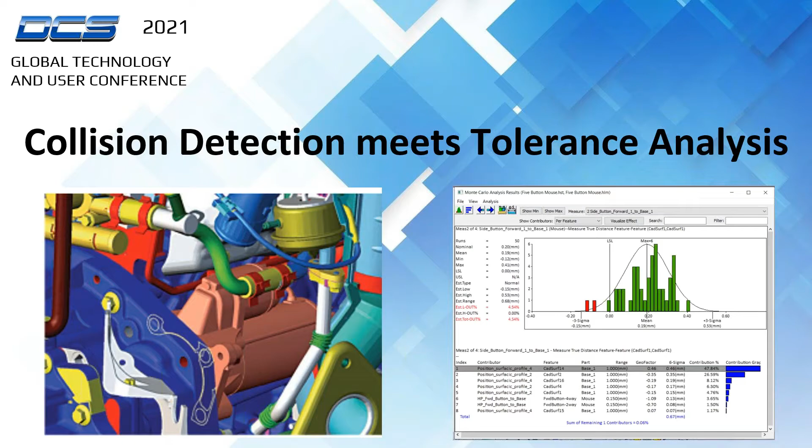Presenting today is going to be myself, Gerhard Bell. I'm a dimensional engineer, ASME certified. Of course, I work for Dimensional Control Systems. And my colleague, Priya, variation analyst and instructor. And she also, which is not listed here, tests our software when we have new capability.

Our agenda today is going to be to discuss collision detection, the difficulty in collision detection, and some new capability that 3DCS has developed. So what is collision detection? It's the ability to predict collision before it happens.

You can see this advancing everywhere, especially in automotive. I love the fact that I can put on my cruise control and practically go to sleep because the radar will slow the car down automatically. That's one form of collision detection. Obviously, if you get in an accident, you didn't detect the collision, but you know there was one.

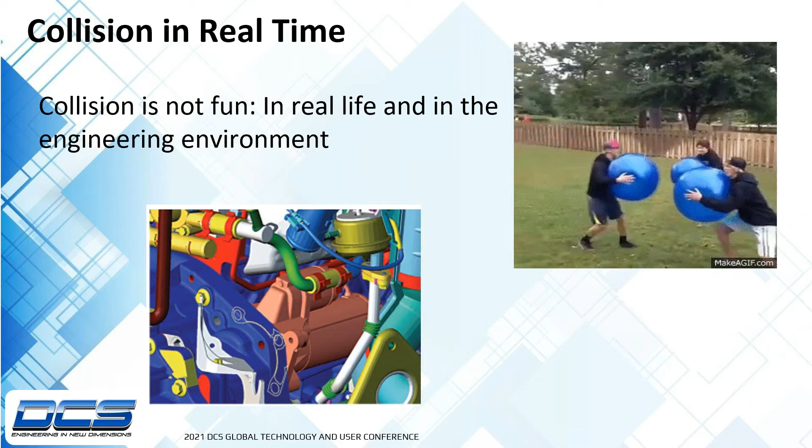Typically, detecting collision is very difficult. The CAD systems can do it, but they deal with perfect parts, and that's easy. They leave it to companies like 3DCS to do collision detection when you have variation. That's difficult. And even though it's difficult, 3DCS can do it right now. But to do it, you have to write a lot of measurements, and you have to kind of guess where you expect there's going to be collision.

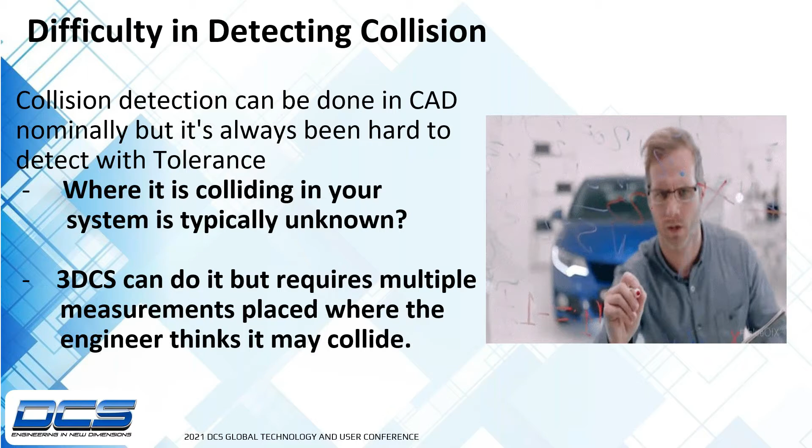Typically, anytime I'm talking to a customer, they say, "Hey, can you do collision detection?" And I get this sad look on my face, kind of like, yeah, but. Yeah, we can, but I tell the engineer, you need to kind of know where you expect the collision to happen. Where's your closest areas? Then we can tell you if it's going to collide, and you would write a measurement there. But it's not really easy, and it's not exact. And you may not pick the right spot.

Well, now this is the exciting part. In DCS's attempt to continually answer the customer's questions or strive to advance the capability of tolerance analysis in that field, we now have collision detection. So finally, when a customer asks me, "Hey, can you do collision detection?" I can say yes. And we've done it by introducing two new capabilities. Priya is way more efficient than I am, so I'm going to hand it over to her, and she's going to tell you about our new single measurement GUI and the multiple measure auto generator. Priya, take it away.

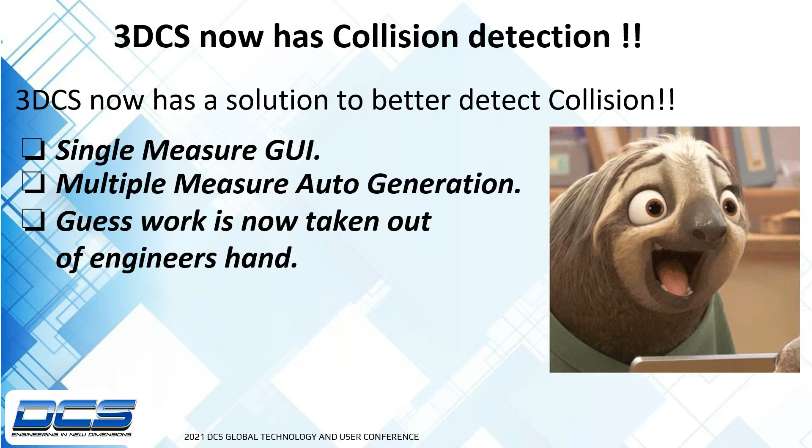All right. Thank you so much, Gary. That was a great introduction for this. So let me take over from here.

So as Gary mentioned, yes, now we can do collision detection in 3DCS. And to do that, we have two new functionalities that we added recently to our mechanical modeler add-on. One is the collision detection generator. Another one is the part distance measure. Basically, the collision detection generator is a GUI where our software automatically generates measurements for the user. And that generated measure is the part distance measure, which I'll cover next.

So this GUI makes it easy for a user, where they can just add the parts to it, and with a click of a button, you can generate how many measures you want.

So what that means, for those of you that are familiar with our software and know about our measurement generator, we already have a measurement generator where you can write X, Y, Z vector direction measurements, but you already have to have your points there, and you have to have the features that you want to measure. With this collision detection measurement GUI, you no longer are writing any measurements. You're just picking the parts that you want to check for collision between. And then this will generate the measurements that you need.

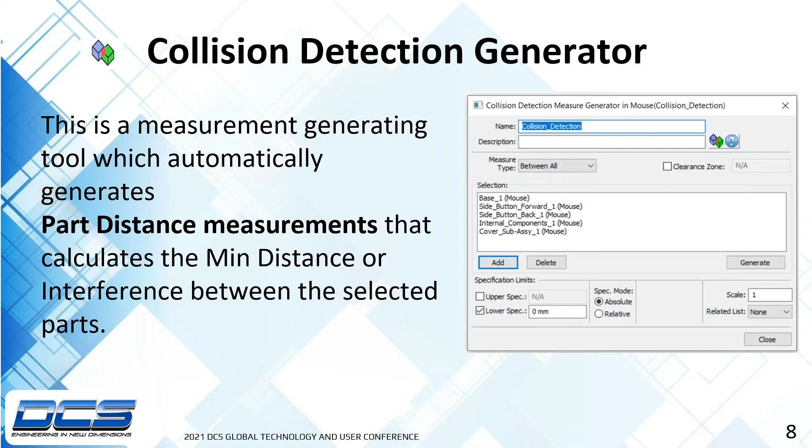And that generated measurement is the part distance measure, which is a new function that we added. Basically, part distance measure is an improved version of our existing feature measure already in our software. You can add parts to it manually, or you can use this collision detection generator GUI to generate the part distance measure, which automatically adds the parts to it.

Internally, how the calculation happens is it looks for all the features of the selected parts in your object part list and tries to measure with all the parts and all the features inside those parts from the two part lists. It gives the minimum distance detected so far with the given information and provides that to be the current value in this GUI. And you have to make sure that it does not really capture all the part information, but only takes in the features that 3DCS has used.

For example, the features that you have meshed using any of the tolerances or moves that you have created in that modeling process. So basically, each part should have mesh in order for our GUI generator to automatically pick that information from them.

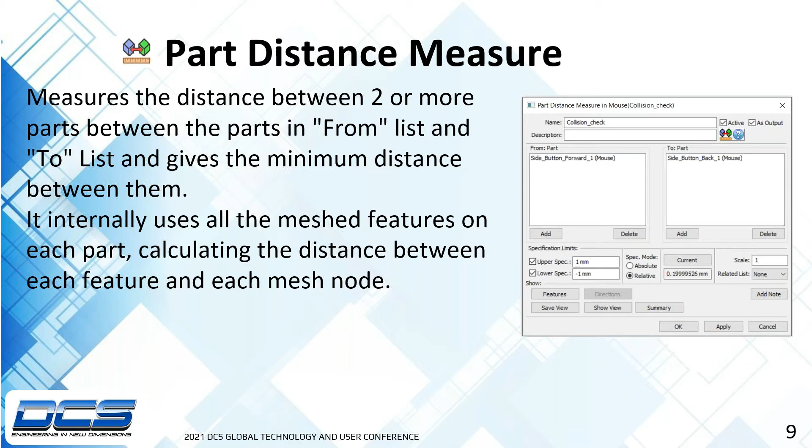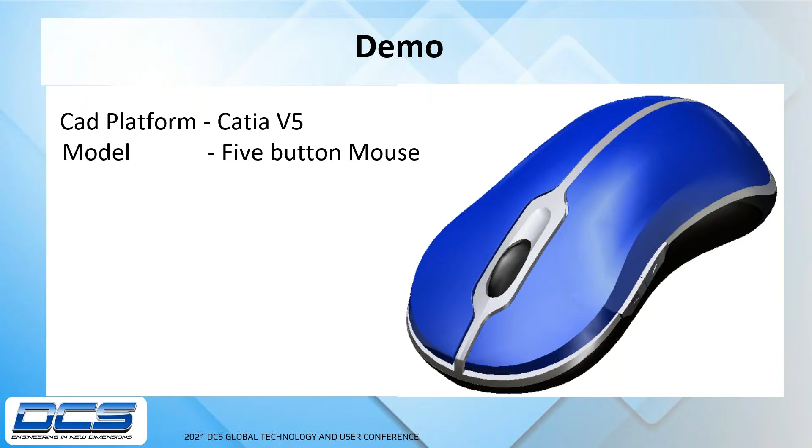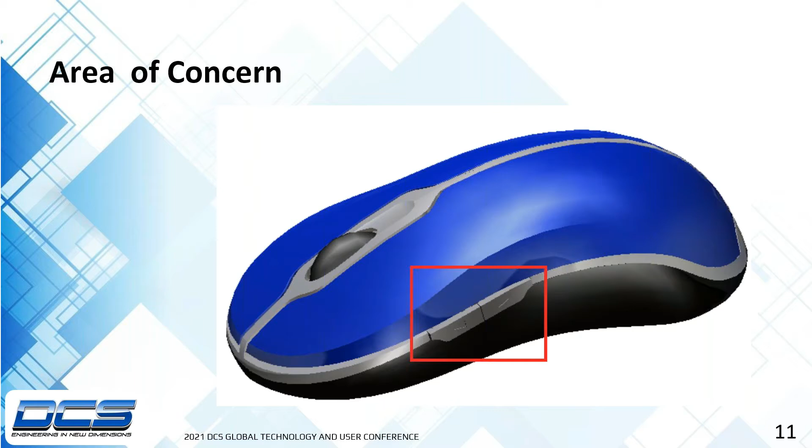All right, so in this demo, I'll be using the 5-button mouse model, and the platform that I'm using for this demo is CATIA V5. In this model, the area of concern, the place that I'm concentrating to detect the collision, is that area that I have marked, which is the gap between the buttons and also all the parts that surround the button. So at this point, I'm going to switch the presentation to my CATIA V5 page where I can show the model and walk you through the process.

So I have the mouse model up. This model is completely modeled with 3DCS where I have already have the moves that make the model build and also have the tolerances already written. Now let me just quickly do a nominal build and deviate so you can see the model being completely done.

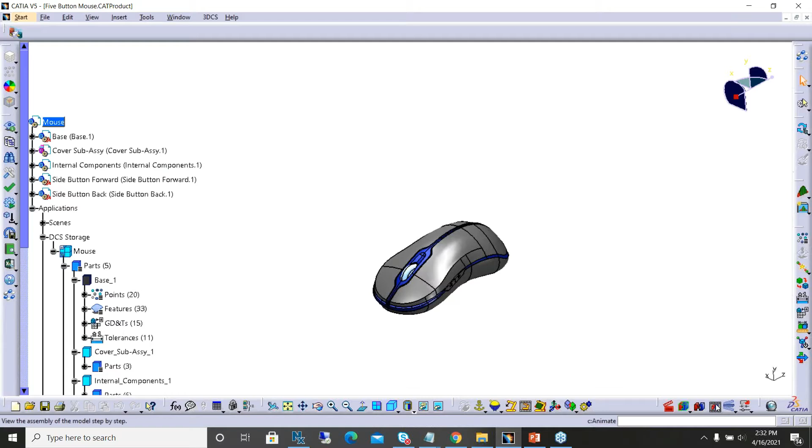At this point, let me separate the model back, and in the mechanical modeler add-on toolbar, let me pull this out so I can show you the new collision detection GUI, and also under that I have the new part distance measure function. To start with, let me start the collision detection GUI here. I'm just going to click this.

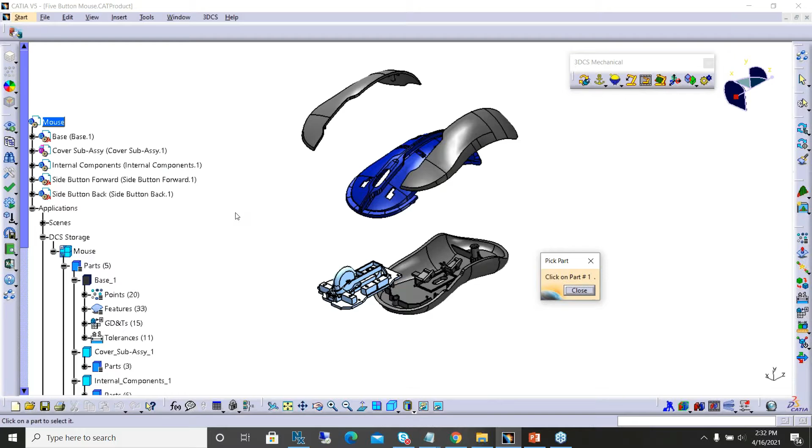So the first thing that pops up is asking under which level you want the measures to be generated. Here you can pick a sub-assembly, a top-level product, or even a part. So here I'm going to pick the mouse, that's the root, and that's opening the collision detection GUI.

So right here, if you notice the GUI, it tells you it's a collision detection measure generator, and it also says under which level you are generating this, and it gives you a default name from which the user can go ahead and change it. And coming down, I have the measure type.

So the measure type has two different types: one is between all, another one is first to all. Between all just creates measurement between all the parts that you select in the list, and makes sure it selects each and every part combination throughout the list. But first to all just picks the first part in the list and tries to create the measurement with the rest of the parts down in the list. So that's the difference between these two measure types.

If I expand on that, between all would basically be creating a combination of part one to part two, part one to part three, part two to part three, and all the combinations of the parts. But if you say first to all, then it's just part one to part two and part one to part three, if you only had three parts. That is exactly right. So between all takes all the combinations in the part list, but first to all just sticks with the first part in the list against the rest of the parts in the list.

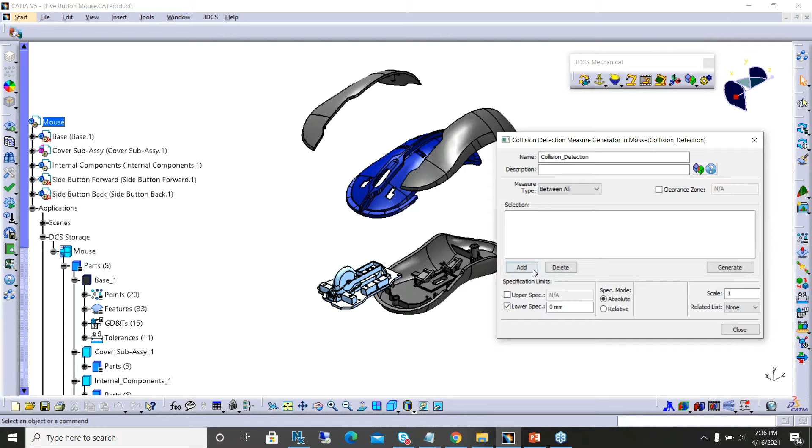So let me get started and add the parts. As I mentioned in the PowerPoint, the area of concern would be the side buttons, so I'm going to start with that. This is the first button I'm going to select, followed by the other parts that are in danger or surrounded by the collision area: the top cover, left, and the base.

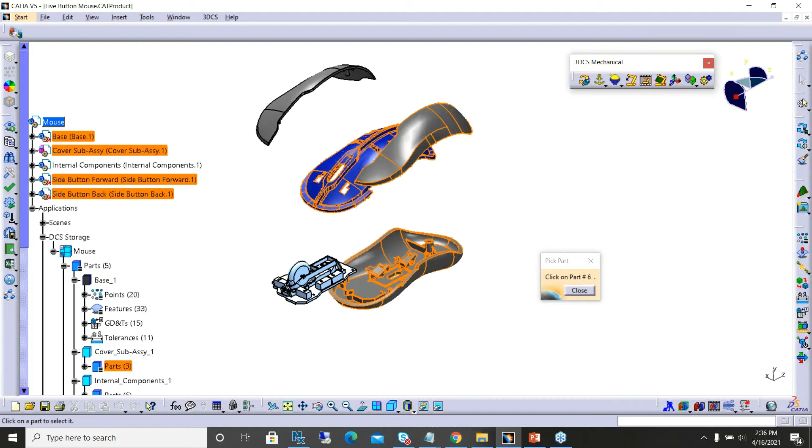It can be in any order, the selection doesn't matter. Now from here, I make sure my selection measure type is set to first to all, so it goes down the list starting with the first part. The measure generator will be the first part, the side button forward to the back, then side button forward to the top cover, similarly to the left and the base. That's how the flow goes. At this point, I think I have all my parts selected.

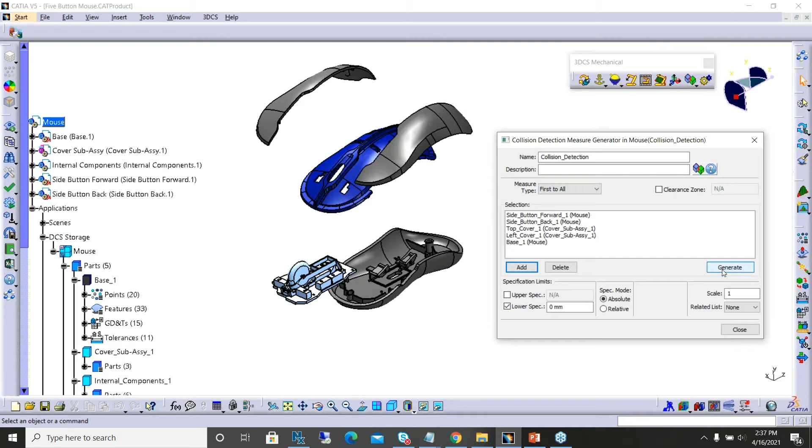I have my specification limit specified, and the next thing I have to do is generate it. Just by clicking the generate button, it went through the process I explained, and it generated 4 measurements for this combination. Let me hit OK, I'm just going to close this dialog.

I'm going to go ahead and look for that measurement in the tree. Now under measures, you can see how collision detection generated a separate folder, and inside that you can see the measures we just generated using the collision detection GUI. As I mentioned before, you can see the difference in the icon to show the generated measures are the part distance measure. If I come down here, this is the part distance icon, the exact thing that we've been using. So these are the part distance measures that got generated.

Now let me go ahead and do a nominal build.

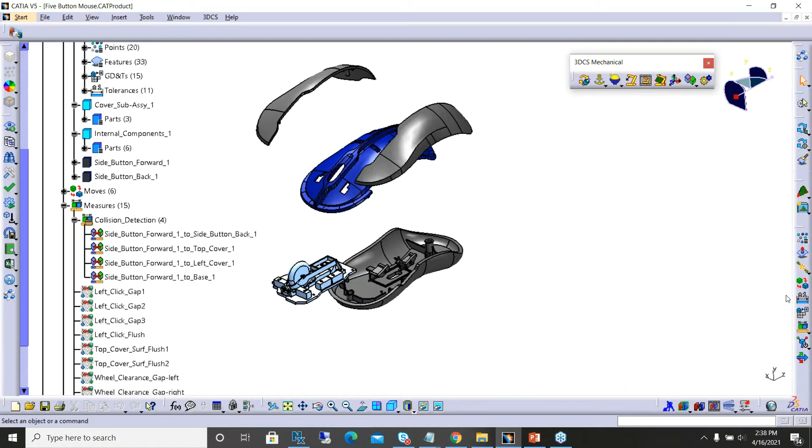You'll notice one of the things is previously, in an early release of our software, we added groupings so that you could group a bunch of measurements in one group, or a bunch of moves in one group, or tolerances. So we're utilizing that capability now, and that's why when she used the collision detection generator GUI, it produced that one group and put all the measurements in it.

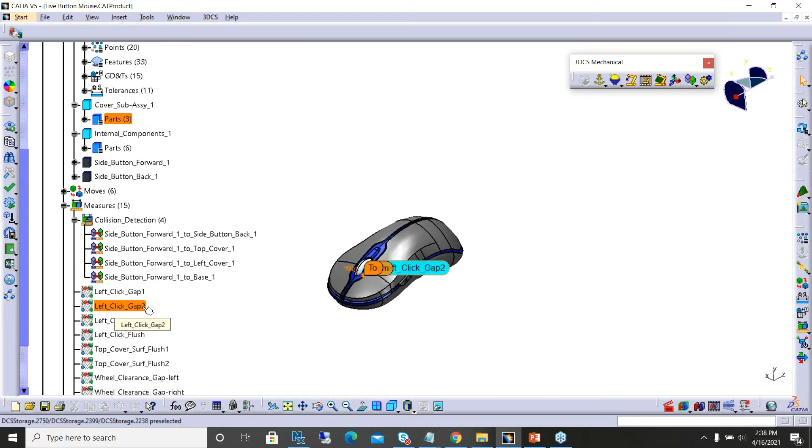At the same time, it's a nice way of categorizing, so if you have the rest of the other measurements in the model, those would be in a separate group, or as you see, it's at the top level where the collision detection generated measures are grouped. It's another way to differentiate and easily access them. And again, this group name is defaulted, so the user can go ahead and change the group name anytime.

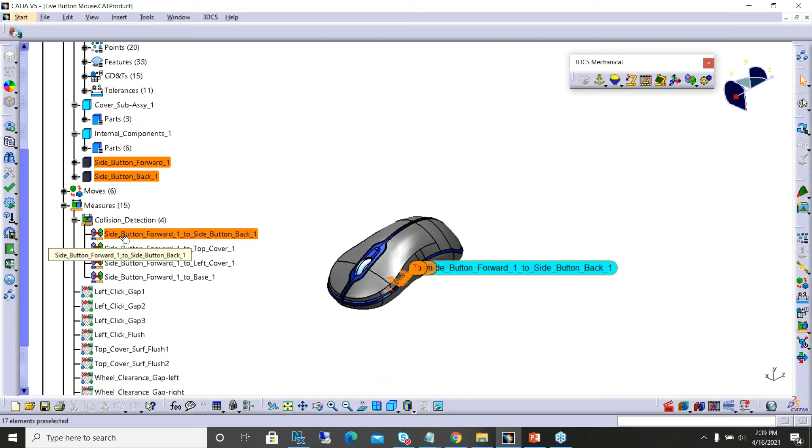The same thing applies to the part distance measure that got generated. Now you can see, by just mousing over or clicking on each measure, it gets highlighted in the graphics, showing the from and to location. To get more detail or a closer look at this, let me zoom into that part.

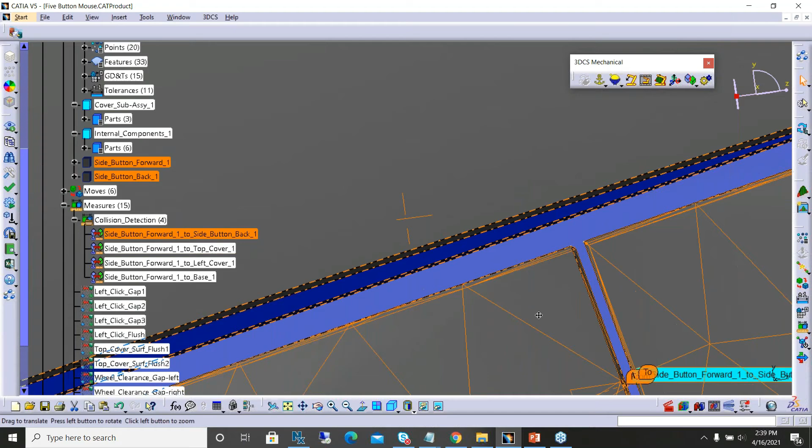So the first measure here says the side button forward to the side button back. I'm going to zoom a little closer and mouse over it again. You can see it's measuring the gap between these two buttons, and it also tells you exactly where it's measuring, right there. So that's the from and to location, and that's the gap it's been measuring for that specific measure. That's one quick way of telling if the part is nominally interfering or not.

So now if I zoom back, what that means, Priya—yep.

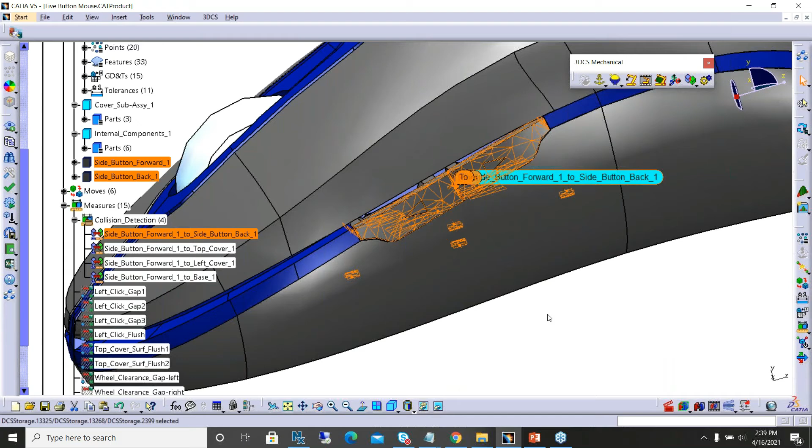Is between those two parts, that's the smallest gap, right? Correct, yes, exactly. So if I hit separate, I can show you what it's actually looking for. Now you can see how if I click on this measure in a separated position, those object features get highlighted in the graphics.

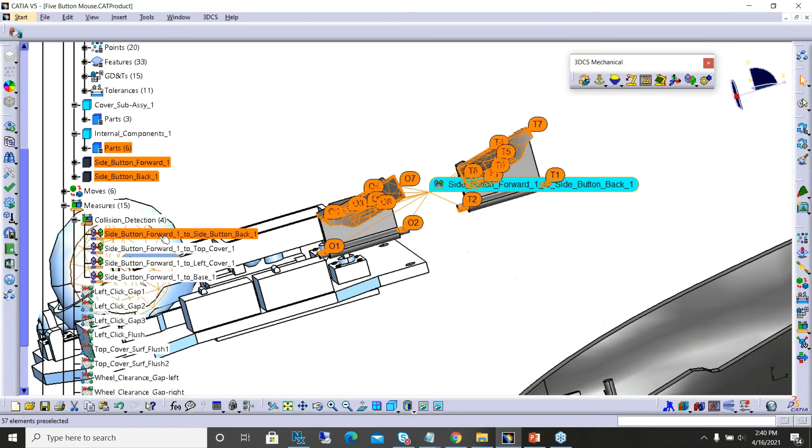Those are the meshed features, what the part distance measure has been looking internally. Now if I double click this, you don't see any of that information in the GUI. Internally it's using all the part meshes, but the GUI just shows the part names in the from and to part list. It's going through each mesh or feature from one part and calculating the distance to all other features in the next part.

So whichever part or mesh combination gives the minimum gap, that would be listed in this current box. Right now for this measure, 0.2 is the minimum gap that has been found in its nominal position.

As I open the GUI now, this is the part distance GUI, where you can change the part name, and in future if you want to remove this part or re-add another part, you can definitely do that. About the specification limit, you can change anything here, and any change gets saved as this measurement and will not be overwritten by redoing the generation from the collision detection measure.

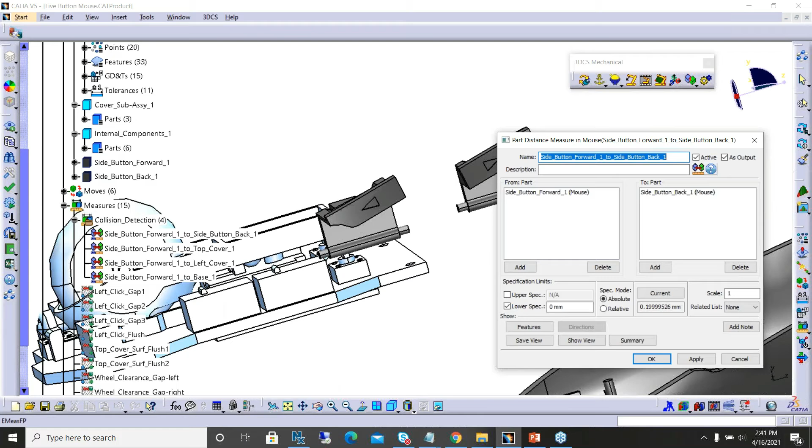Now that I have this all done, I'm just going to close this. This looks good. So now I just generated one set of measurements that I'm looking for. Similarly, I'm going to do the same thing for the back button.

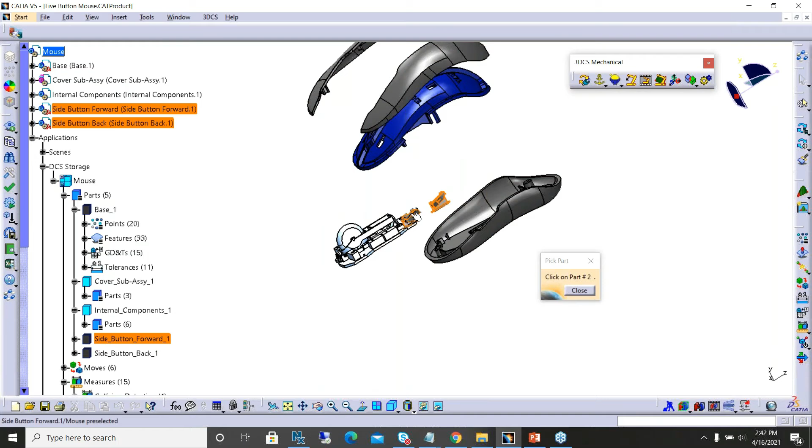Here I'm going to make sure I select the back button and check for any interference that this button is surrounded by. Let's go ahead and do this whole process one more time. I'm going to select the collision detection, put the mouse here, and start adding the parts, starting with the back button followed by the rest of the other parts.

Now, in addition to this, I'm going to do it a little differently this time. I'm going to pick the other cover button. Now you can see the right cover, that's the new part I added for this measurement generation. Even this time, I'm going to still stick with first to all because I'm just looking for these combinations and don't want the other combinations to be generated.

In addition to this, I'm going to use the clearance zone here. As I mentioned before, if a user isn't really sure about how the parts are interfering, they can use this advantage of the clearance zone. What the clearance zone does, by setting this checkbox and giving a number, say for example 1 millimeter...

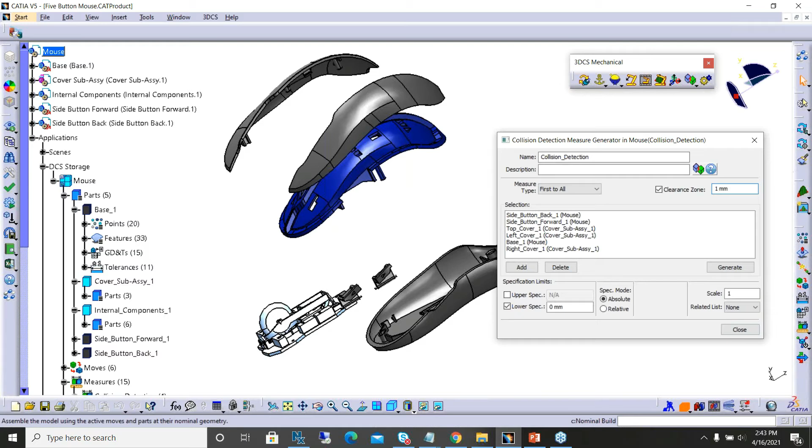The important thing I have to do is put the model in its nominal position. From here, it's just going to look for the gaps between the side button back to all the rest of the parts that I added to the GUI. It makes sure that if those parts fall under this 1mm zone, then it generates the measurements. If not, please ignore that. That's the rule we're applying by setting this clearance zone.

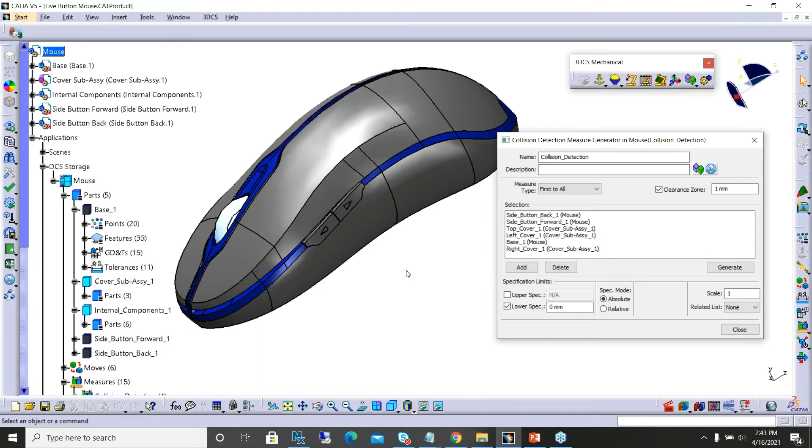For this example, I can clearly tell that the right cover I added is nowhere near the back button, so I wanted to remove that. But there could be scenarios where a user isn't really sure, because there could be multiple parts in their model. In that case, they can use this advantage and minimize the whole generation process, which in turn reduces a lot of time in your analysis.

So now here I have this clearance zone set to 1mm, measure type is set to first to all, and I'm going to leave the specification limits as is. So before you generate it, what that means is by setting that to 1mm, you're essentially saying you only want measurements between any features that are 1mm or less. Correct. So it will eliminate writing a whole bunch of extraneous measurements that it doesn't even need to check.

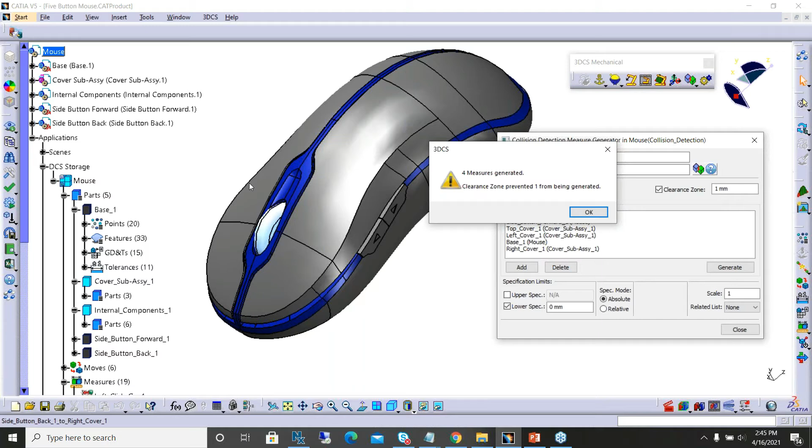Right, exactly. So now if I go ahead and generate it, this message will be even more clear for the user. It says we generated 4 measurements and the clearance zone prevented 1 from being generated. So we know the right cover was nowhere near the back button within that 1mm zone, so it eliminated this measure combination from being generated. That's exactly what the message says. I'm going to hit OK and close this GUI.

So now, as I told before, any new collision generation or any new generation we apply from the GUI, a new set of measures gets created every time.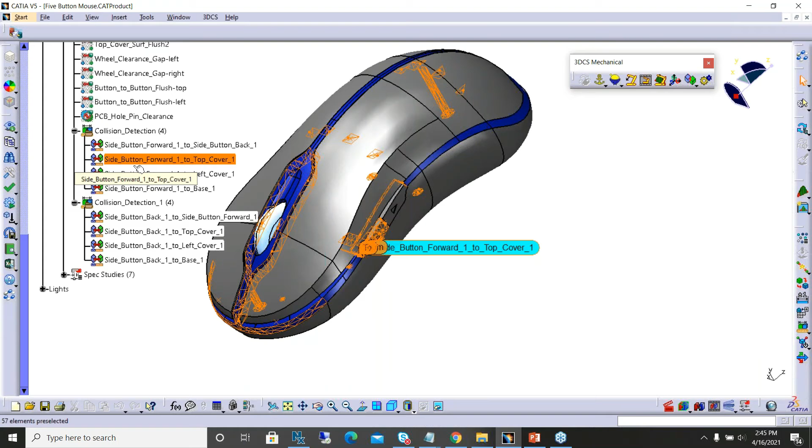It does not override the existing one. So that's why I said you can anytime go ahead and change this information, and that information gets saved to that part distance measure, and it will not get lost by generating the GUI one more time. So now I have the measures generated.

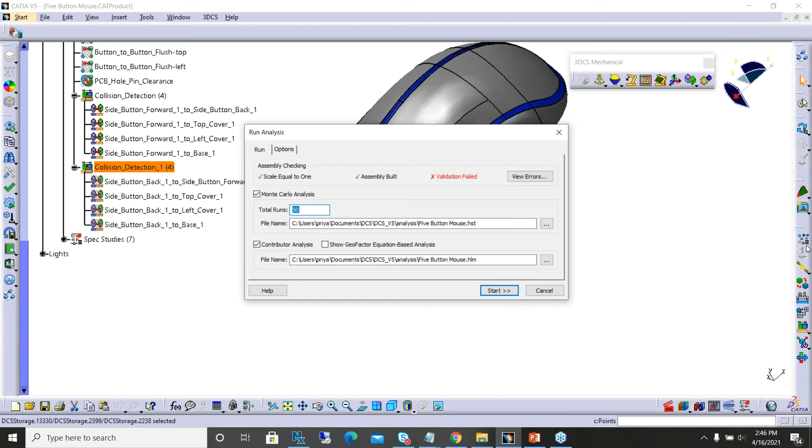So now the next thing I have to do is just run an analysis and see if there is any interference happening between the parts. So for this example, I'm just going to run the collision on the side button forward. So I'm just going to deactivate this for now, and let me quickly run the analysis. So let me move this away. So it's running the Monte Carlo analysis, and followed by it's going to run through the contributors, and will give you the results in a minute.

Yeah, so for those of you that are familiar with our traditional feature measure, that takes a long time if you have a very dense mesh. And so this is still going to take some time, but we have a new algorithm which makes this much faster, which does give us the ability to globally check between all the parts. Of course, it's not going to be instant. So when you want to do collision detection without having to think about it, the computer's got to do more thinking, and it will take a little more time. Yeah, and as I said, it's just going through each mesh node at a time with all those builds. So that's the delay. All right, so now I have the result popped up.

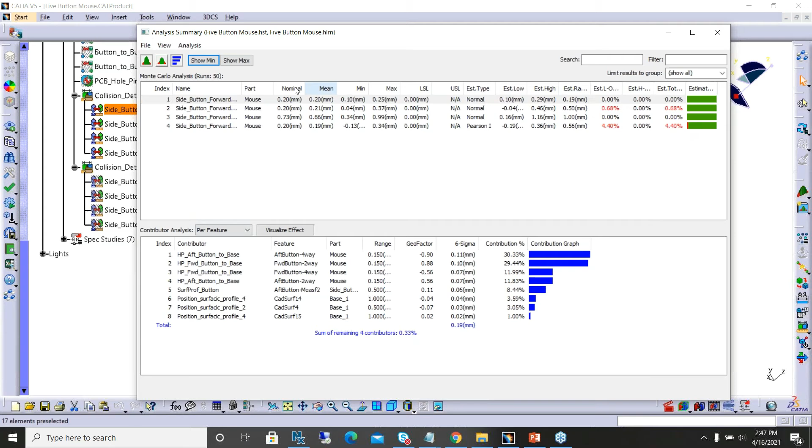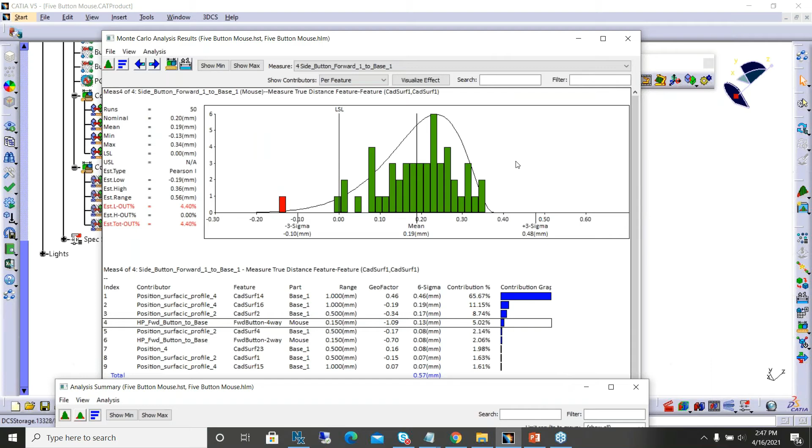So now just by looking at the summary page, I see a tiny bit of redness in this last measure. So let me get into a deeper look at that. So that's a measure that was between the side button forward to the base. So now I found there is a minor interference happening between those two parts. And to check even more clearly, let me move this away. So from here, let me do show min. So show min will build the model exactly to that spot where it is interfering. So I'm going to click that.

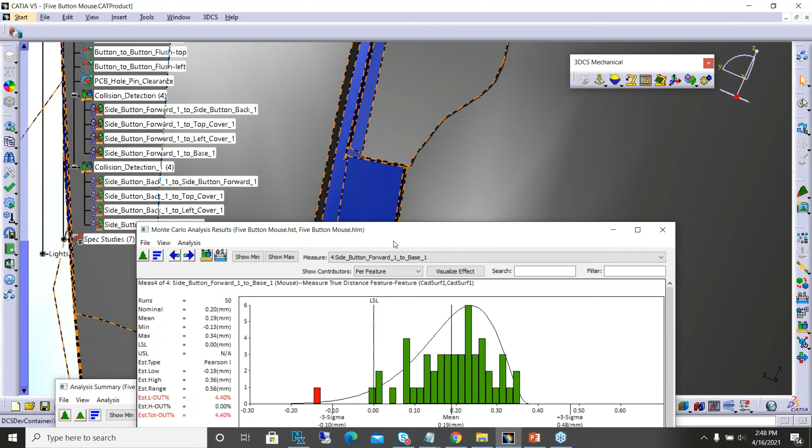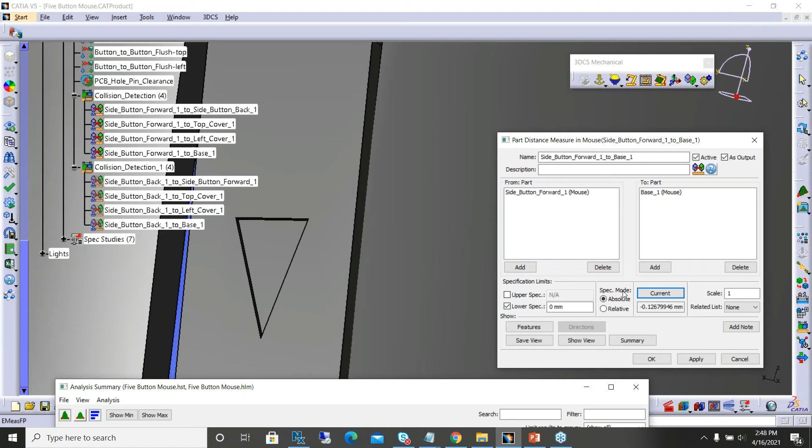Okay, I see a small interference happening at that spot. So to even more clearly tell the location, now I built the model to its min position. So at this point, I'm going to click on the side button forward to base. Oh, that's the interference. That's not the one. All right, there you go. So I'm going to click on that. And if I hit current, you can see it showed me a value of negative 0.12. So that's the location where it's actually measuring the min gap, and that's where it's measuring the interference between the parts. So let me go back.

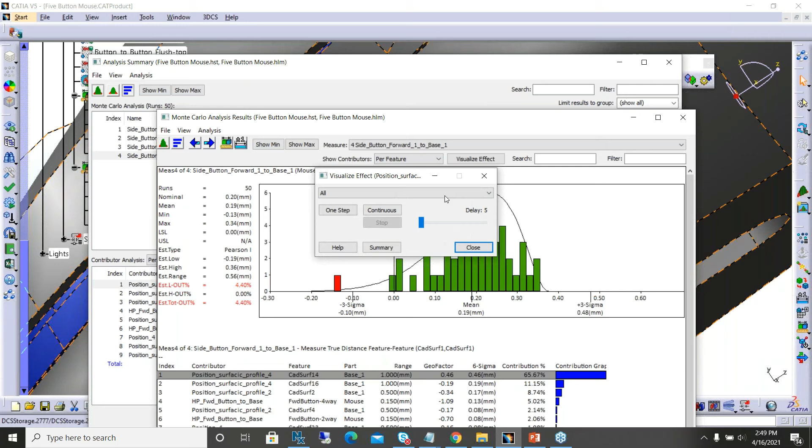There you go. Yes. So now if I hit OK and come back to the result page, let me click back on open. So now we know where the interference is happening and what the interference amount is. The next step is to know which is the top contributor that's contributing to this specific interference. So now from this contributor list, I can tell the first surface profile on the base is the top contributor. To give a clear idea, I'm going to click that. I'm going to say visualize effect. So now I can see how that one specific contributor is getting applied, and I can see how the part deviates for that. So now I'm going to hit continuous.

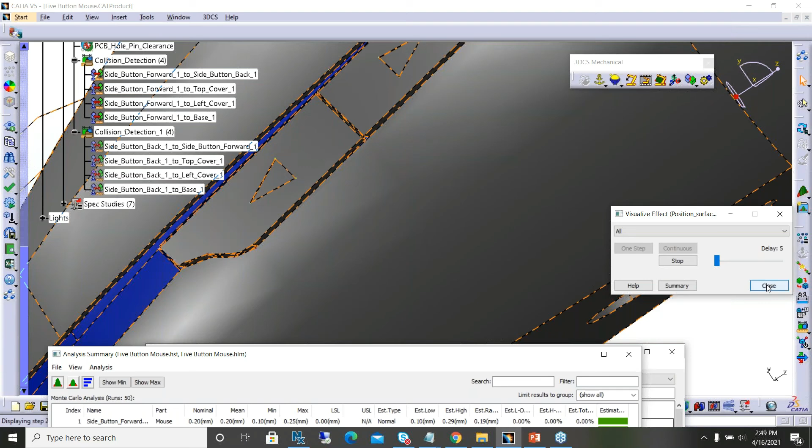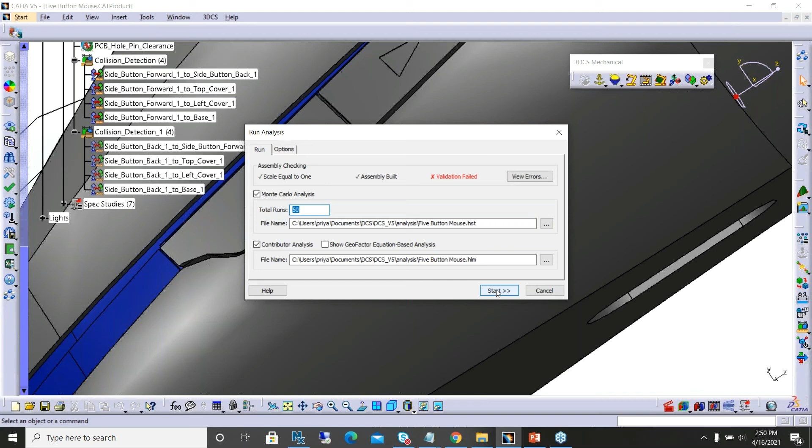Move this away. Yes, I think I saw a small crash happening at that point. So I can see there is a crash happening visually also for that specific tolerance. So now from here, I'm going to stop this. I'm going to pull back that tolerance. I'm going to open that. I can see it's set to 1. So now at this point, I'm going to tighten it up to 0.5. I'm going to come back and close this. I'm again going to nominal build and run the simulation one more time to see if that tightened tolerance makes the interference look better. So I'm going to rerun this one more time.

So while this is running, I don't know if you guys noticed, but from the first option, when it showed there was a collision and she went back to that measurement, it's going to highlight where on the part it collided. It's looking at all the mesh, but then it's changing the to and from. So you can put it in the minimum, and then we will show you exactly where it crashed. When I talked earlier that we can do collision detection without this, we would have got that same value if we happened to write a point-to-point measurement at that spot. Now you don't have to write that, and you can just run this, and when it collides, we can show you exactly where it collided.

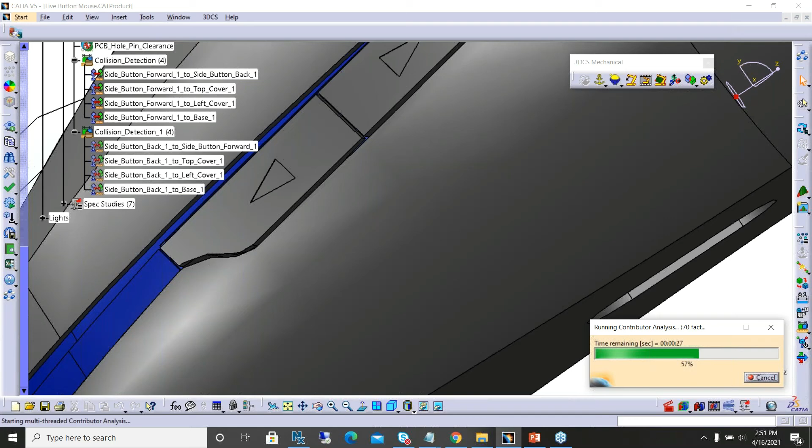Yeah, that's an excellent point, Gary, because when I ran this nominally, when I checked the gap, it was measuring here, right there. But now we would have imagined, okay, maybe we should look at the gap here for the further calculation, and/or have written a feature distance measure between these two. But now we know after applying tolerance, the crash was happening in a different location. So that's why this collision detection, the new part distance measure, is even more efficient, that we don't have to keep changing or keep writing measurements.

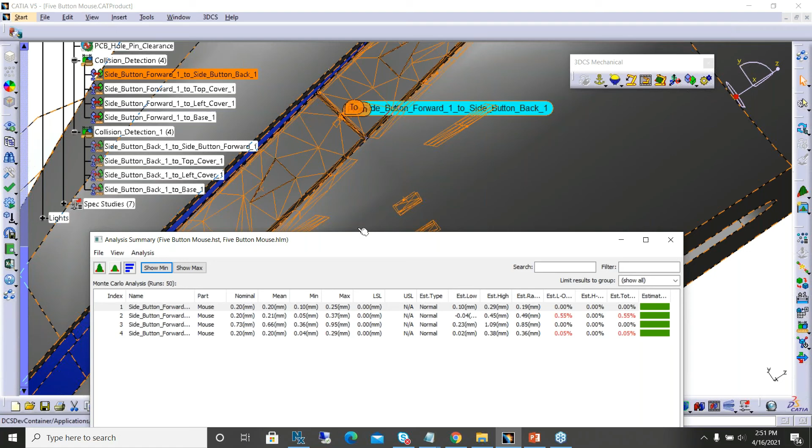So thinking about the new location. Yeah, we don't have to guess. Yes, exactly. So all right, so now I think we ran this result one more time after fixing up the tolerance, and I can now see there's no redness. I'm going to get into the measure one more time. And now if I hit Show Min, whichever the least location, and come back to that measurement one more time to see what is that new gap, where is it measuring?

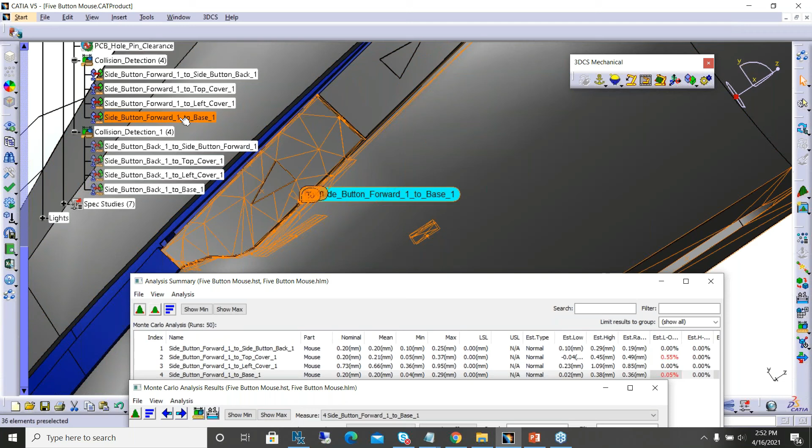I'm going to click that. It says already it's measuring the same spot, but this time with the gap in it. So now if I hit current, there is a gap of 0.03 where there's no interference happening. So I'm going to hit OK. So now I think to summarize the whole process.

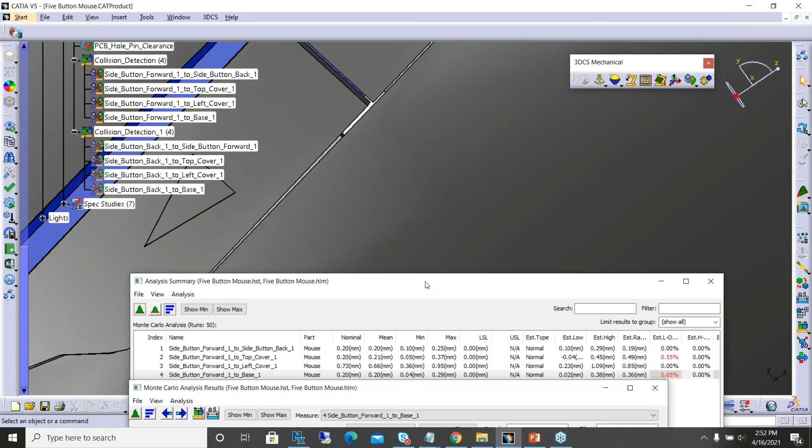So what I did, I had a completed model, which I wanted to make sure that there's no interference happening. So that's where I used this GUI, which in a button click, I just selected all the parts and generated the measurements. And now I had the measurements already generated. So now I ran the simulation to check the results, how it looked when the tolerance is being applied,

where I found a spot where it was interfering, then by just tightening up the tolerance, I made the model work better where there's no interference happening now, and the new results gave me a promising answer, so I'm good here. So that's the way we determined the location, and we solved this issue even more efficiently.

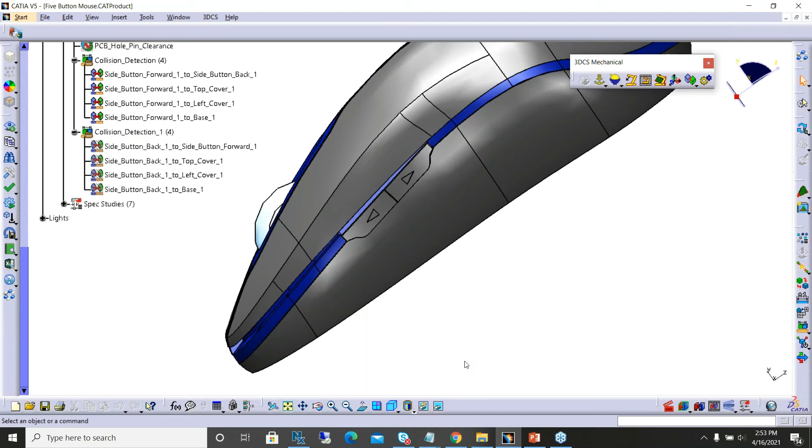So, Priya, you were showing how the collision detection auto-generated that measurement, but you can, if you scroll up in the tree, you can see that these are just more measurements added, and she already deactivated all the old measurements that were in the model, which were just point-to-point measurements. And now we have all these part distance measurements.

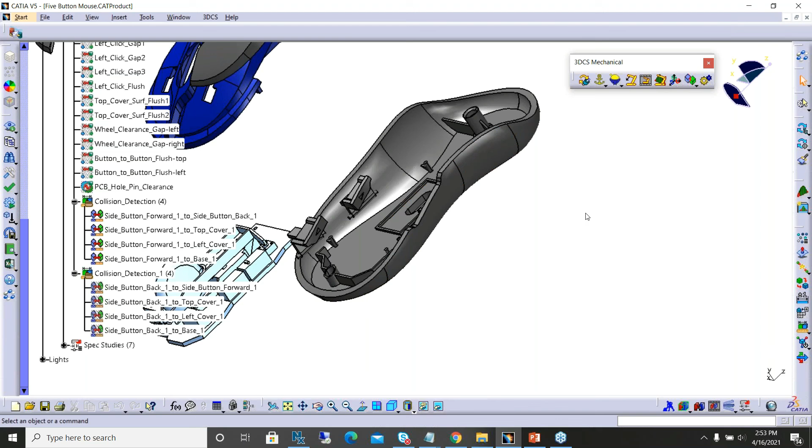And if she wanted, she could write just a single dimension distance measurement between two features without using the measure generator, and it would do the same thing. It would use the same advanced algorithm to look for the minimum gap between those two features that you picked.

Exactly. So to just quickly show you that difference, now if I click that, say I want to know the gap between these two covers, I'm gonna select that, hit close. Now in its separate position, let me apply and hit Current. So now you can see there is the max gap. That's because it's in separated position. Here, let me close this.

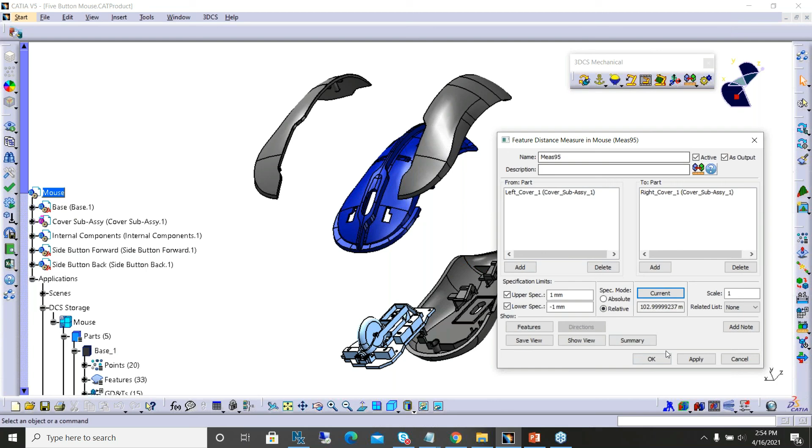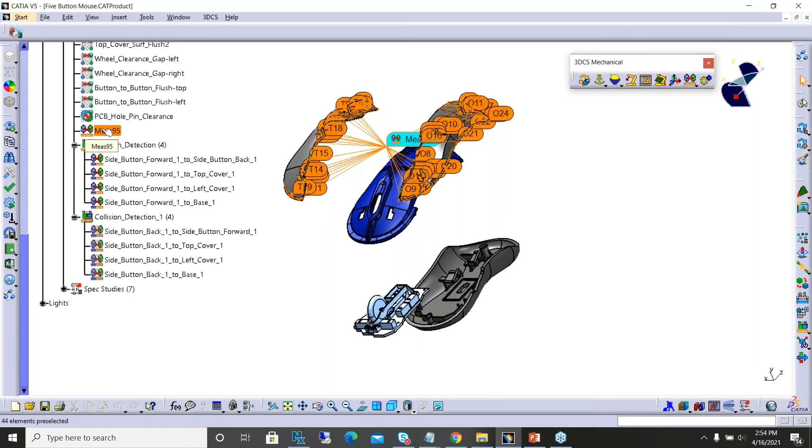Then as I just wrote that new measure, you can see that measure gets added to the list. And now by clicking on that, as I showed you before, it just highlights all the mesh that has been used in this model, and it tells you these are the mesh, or these are the features that we are using for the calculation. So now from here, again, you can quickly nominal build, click on this measure. If I zoom into the location, that is the closest distance that is measuring between the parts.

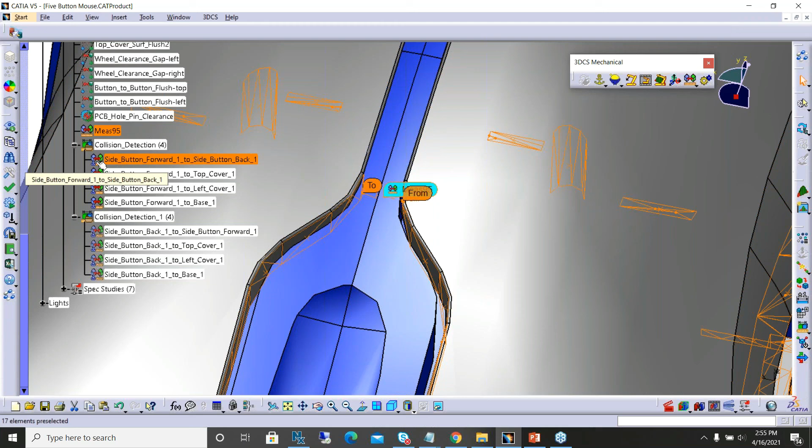So again, this is a measure that I manually wrote using the new feature distance measure GUI, and these are the measures that we generated. Another cool way of checking it is you can see how this measure does not have the small tiny icon. So that's the way to differentiate, giving a user a better understanding, saying that these were generated measures and this measure was created. So just an add-on information on that.

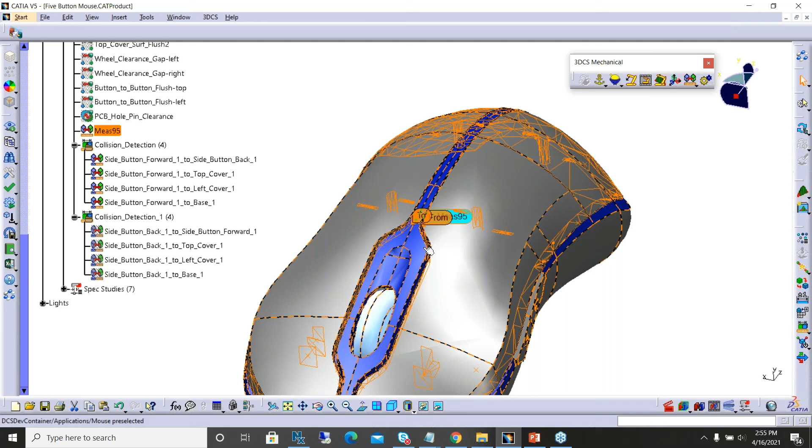So yeah, thanks for bringing that up, Gary. So I was able to create that measure and show it too. Yep. I didn't know about that little icon. Oh yeah, right. So we use this icon for our extraction. Like if you go ahead and do a GD&T or MBD extraction, we have the small tiny icon. So we thought we can use that for this because this is again a generation that a user did not manually do. So that's a way of differentiating, and the user can be aware of it. So yeah. Nice, very nice.

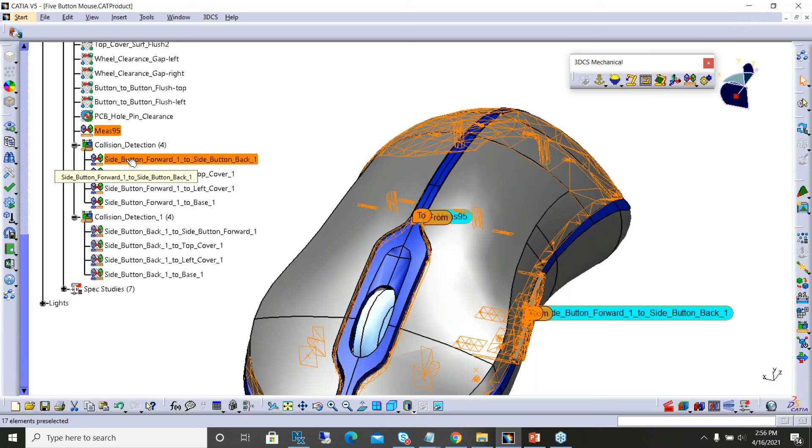So all right, I think I covered all the topics that I planned to show you in this demo.